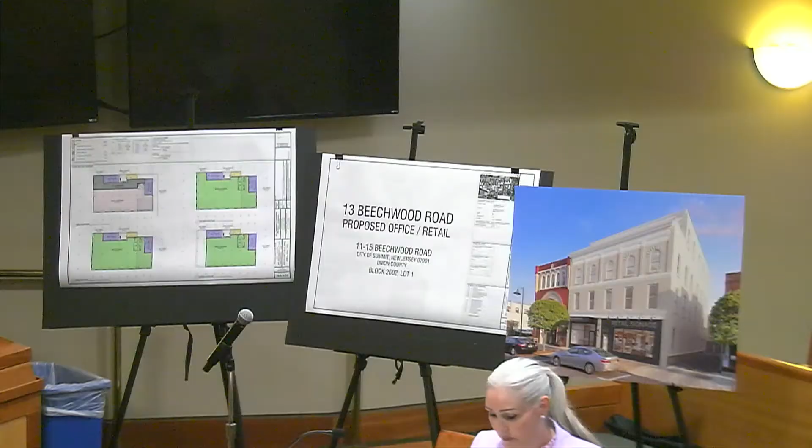You ready? Yes. Okay. In response to the comments and feedback received from the Board of Adjustment and the Historic Preservation Commission at the prior hearing, can you describe the process your firm undertook with the applicant to reevaluate the design and incorporate revisions to address the concerns that were identified? Yes, we carefully listened to the board and the Historic Preservation comments regarding the facade, the Beechwood historical elements of the building, the detail, the horizontal features of it, and also just the nature of the architecture.

And we carefully went into the building, took our time to study the architecture, really study the floor, how the building was braced, how it was built, to see if we could actually preserve the facade. After further consideration and analysis, we determined that there's a way to preserve the facade, set new floor elevations, do minor modifications to get ADA accessibility, modify the windows with slight tweaks on the sill heights, and really set the elevations so that we could work with that existing facade. That will require, if you don't mind, I'm going to approach the rendering and point out a few features.

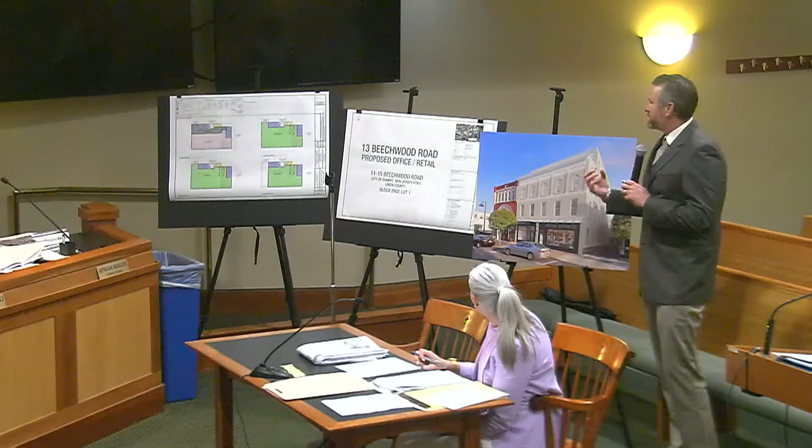If you don't mind, I'm going to go to drawing A201. It's our beechwood facade.

Due to this type of construction, which I'll get into further in testimony, we're going to have this as a lighter frame structure on the front, so it's going to be more windows and wood style architecture that mimics the style of the retail in the front entrance.

So it has more of that 1897 style of architecture that mimics what was there previously, and we wanted to maintain that similar Federalist and colonial style of architecture for the building.

Now that you've described the overall changes made to the design, can you walk the board through the revised plans that have been submitted and explain the specific revisions and improvements reflected on each plan sheet?

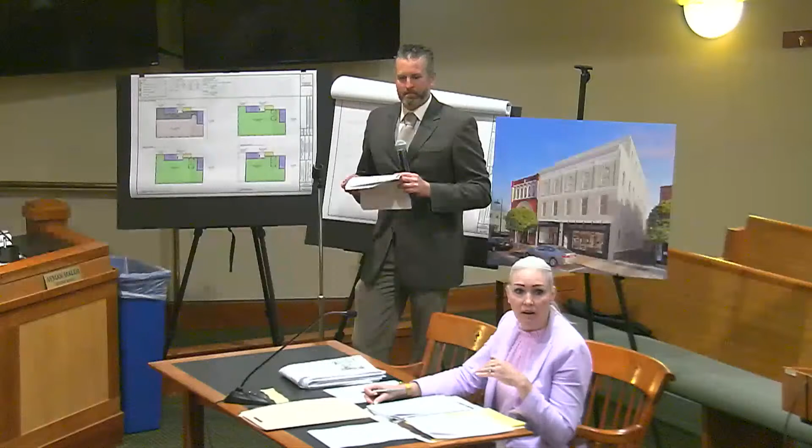Mind if I ask a quick question - is there any way you could actually get to that 299 without building the 4th floor? No. I'll have another exhibit that shows you technically why you can't, but if you wait for the next exhibit, I think it'll lay it out more clearly.

And if you could just go through the rendering and discuss the materials and the colors. Do we need to bring this one in as a new exhibit? No, this is part of the filed plans. Okay, so you're good, very good.

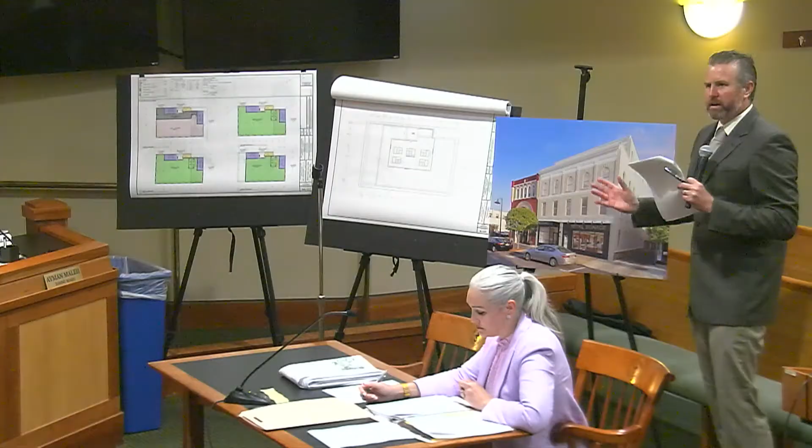So the existing building is white, pretty much washed out. Every cornice, every detail, every element of this building is just the same color - it looks like they just took a roller or sprayer and sprayed over it. So we want to accentuate some of the details of the building.

We want to accentuate with just a light color pop on the cornice on the 2nd floor, the cornice between the 2nd and 3rd floor, and that cornice element that caps the building. Also detailing and giving a slight color pop and variation for the column capitals, and that 4th floor element up above, as well as the infill.

The field of the building will be an off cream or off white color to give a slight contrast. We don't want a large contrast - something subtle that makes that horizontal articulation accentuate the building and make it feel a little more reduced in design.

The side facade we're going to paint. The reason is that to match that brick from 120 years ago would be almost impossible - we can find similar style and size but we will never get a color match. So what we want to do is paint that side facade, keeping that rubble stone finish.

Our base will be anchored with an off charcoal, something to make that retail entrance and that office entrance pop from the street. So it gives you some nice contrast on the ground floor, and then the field of the building neutralizes itself and gives balance.

What's the color of the storefront mullions, and what's the color of the window frames or the storefront on the fourth floor? The window frames will be white on the second, third, and fourth floor. The ground floor will be a bronze. Thank you.

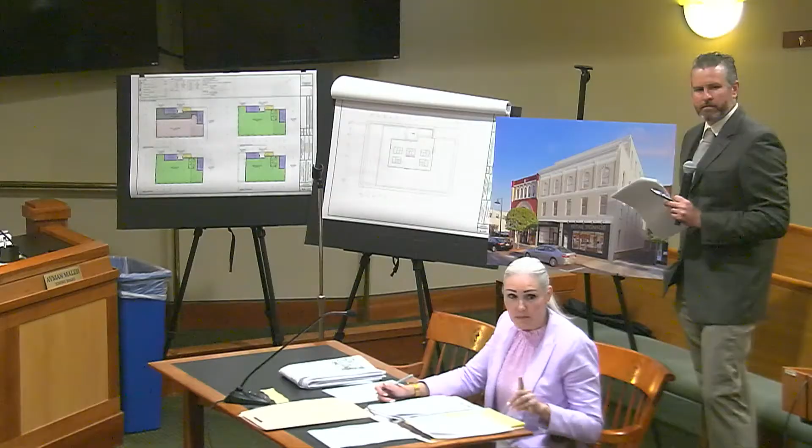Perfect. We're not to the exhibit yet, but I promise it'll be the one after this one.

You've prepared a comparative zoning chart, which I would ask be marked as A5. Can you explain what this exhibit demonstrates and how the revised plans compare to the original submission from a bulk and zoning perspective? Yes, we prepared a letter dated June 23rd, 2026, summarizing our changes to the plan and our approach. Attached to that letter is a zoning analysis comparative chart.

I'm not sure if the board actually got that letter. Oh, they did not get that letter. Okay, so I guess if you go through it, I can provide the board with a copy.

So the changes we made: first was building coverage. We had a reduction in building coverage from 84.10%, or 3,468 square feet, to 78 point... having a hard time seeing that number, let me bring myself closer. You're comparing to the previous submission, not the current construction? Correct, the previous submission.

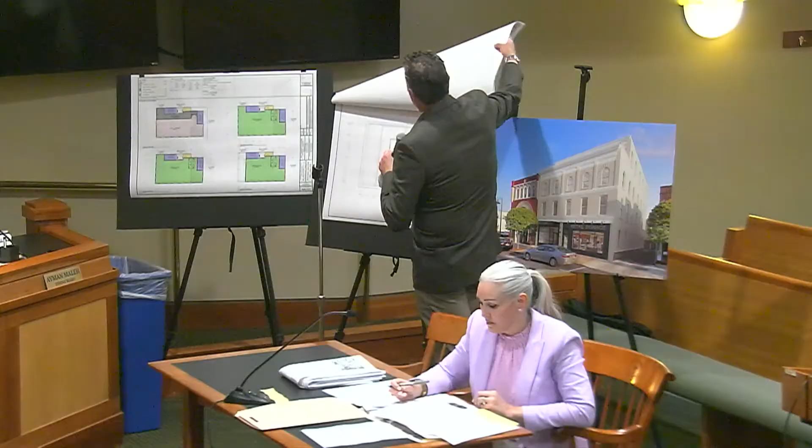I'm going to utilize drawing T002, our zoning analysis and site data. Our building coverage was reduced from 84.10% down to 78.25%, so we had a reduction of approximately 6% in building area. That's a result of us having a greater setback along our adjoining properties on the east side and to the northeast side. Setting ourselves back reduced our building coverage calculation.

So how many square feet does that boil out to be? That ends up becoming 3,227 square feet, where it was previously 3,468, so it's about 240 square feet.

So you reduced that, but you actually gained office—retail space—by doing away with the parking spots. Correct, retail space. Yes, but we also increased the setback in the back of the building, so that's where the reduction was. And then I think there's also an increase in the total side yard from 0.01 to 0.06 feet.

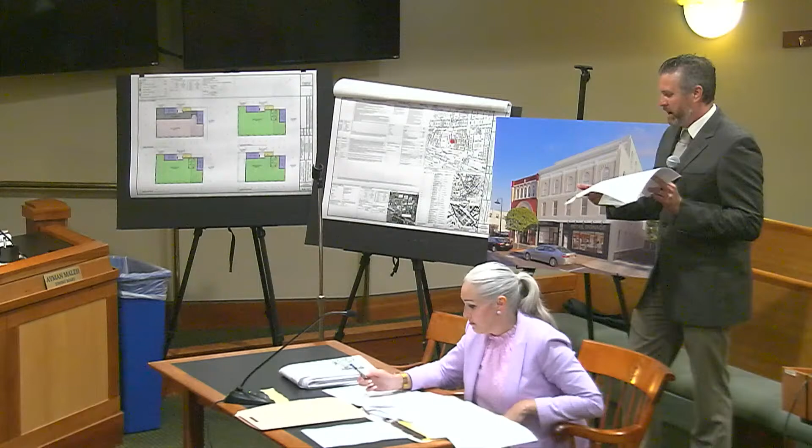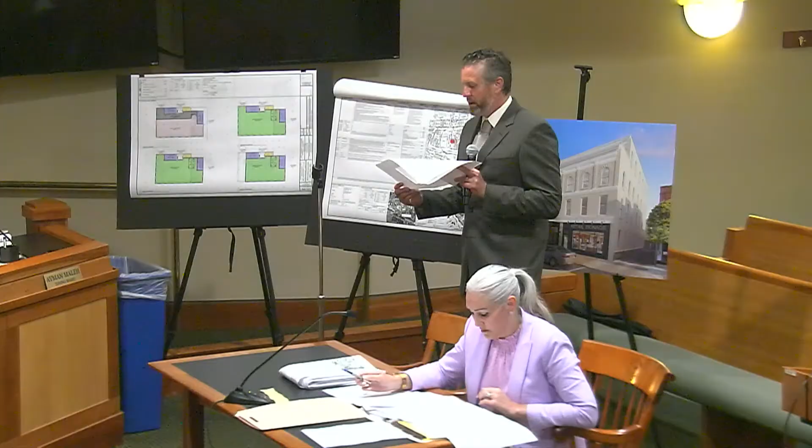We also reduced the building height by 3.67 feet as I previously stated, and the appurtenance was 3 feet 1 inch. We've reduced the mounting height of the facade lighting by 6 inches, down to where the existing cornice line is. We've reduced the terrace lighting on the fourth floor down approximately 2 feet, or 1 foot 10 inches, because the building height came down. Other modifications were signage mounting, also reduced in height because that cornice holds us to a certain elevation, since we want to keep the existing cornice and not modify that existing facade. We also modified the illumination for our lighting so that we have an egress path around the backside, needing lighting to illuminate that 5 foot setback. Going back to SP401, we're just illuminating this 5 foot area along the back of the property.

Okay, and then the original application also included a fourth floor component. Can you explain how the role and design of the fourth floor has changed as part of the revised plans, and how it relates to the other modifications made in response to the comments received at the prior hearing, using Exhibit A6?

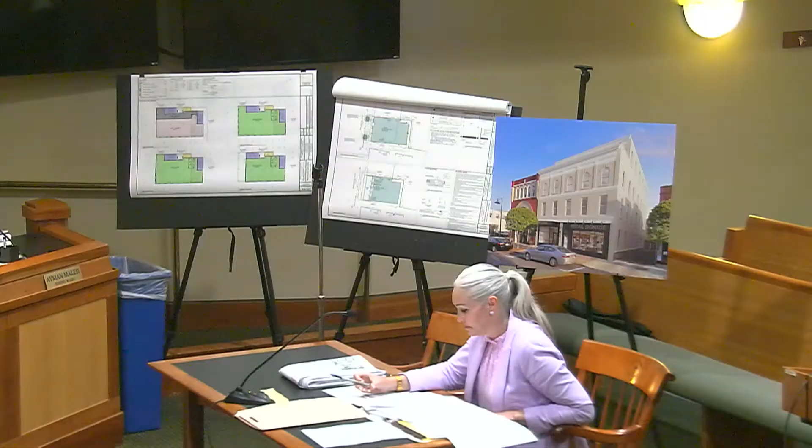So we prepared drawing AA201, an area reduction analysis of the volume that was lost due to setbacks or other components or site limitations that we had. If I can, I'll label that A6.

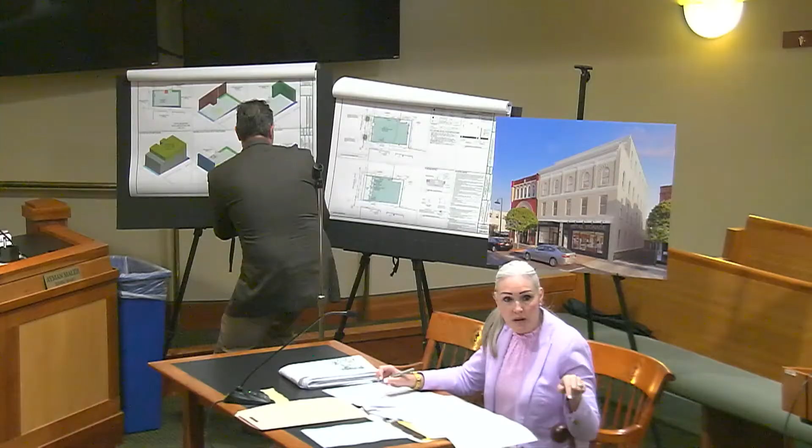And can you see that from over here? Do you want it in the middle? Would that be better? That's okay. You can easily move it. Yes, do you want to just move it to the middle? Because I think we can see it better. Thanks.

So we had a few constraints on the property. We have the existing facade, which is this image in the top right corner. The blue area is the existing setback of that facade, so that's 4.4 feet from the property line.

So 4.4 feet across the property equates to 630 square feet. That's 210 square feet per floor at 3 stories, which is permitted by the zone, by the CRBD zone, and that equates to 630 square feet of gross floor area.

If we were to build to the property line, to that front property line, which is also permitted in the CRBD district, we have a slight encroachment of our adjoining properties here on the north side. Both of those buildings have a slight encroachment onto our property, and the elevator is allowed to be eliminated from the calculation. So that, across 3 floors, at 119 square feet per floor, is 357 square feet gross floor area.

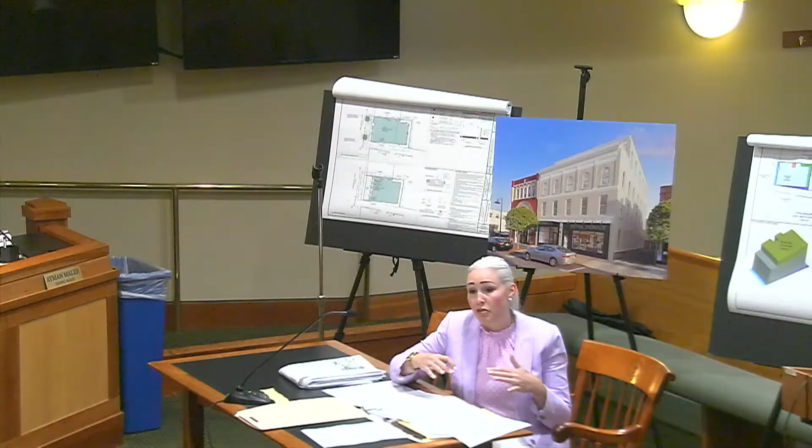So if they knock the building down and built it to the property lines, which they're permitted to do, they could put 300% FAR on 3 floors, but that would not be a better design. It would stick out beyond the boxwood property, so you'd have a building that projects beyond the boxwood building, our adjacent property, which would then reduce the sidewalk. You'd have a building that was touching the neighbors.

Well, I'm just saying, you're telling us you're losing that. Well, but you gained it with the fill into the backyard. Oh, yeah, from our previous application, we only gained 300 square feet from the fill-in of the parking. Times 4, is 1,200 square feet.

But I think it is easier to give a little bit of reference to what exists in this conversation, to not just compare it to the previous, because now we have a new set of drawings, and I think that's where some of these comments are. It should also be considered in relation to what is permitted, and what is permitted is 300% FAR on 3 floors.

This is not a comparison from the previous scheme. This is a comparison versus as of right. Yes, correct. That makes it a little bit better.

Okay, and you also prepared a sightline exhibit A7. Can you explain what this demonstrates regarding the visibility of the fourth floor from the public right-of-way?

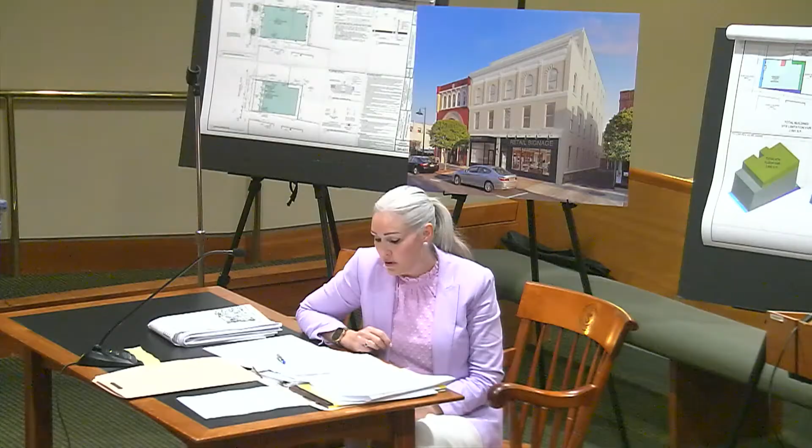I'm going to first start with the rendering because that actually depicts it. Do you mind putting this up really fast? It depicts exactly what you would see from the street. So we took this rendering from the opposite side of the property, and you'll get a glimpse of just that slight cornice on the top. We wanted to show the angle because we want to show the architectural style down the building.

But if you're walking down Beechwood, on the opposite side of the sidewalk, you would only see approximately 2 feet of that building across the top. You would see it on the side, but because it's the same architecture, it blends in. That was the other reason why we wanted to stick with that similar architectural style, is that it would blend with the existing building better.

So our line of sight diagram, and I'll come back to this exhibit now. Our line of sight diagram A301, I'll mark that as exhibit A7, shows a person 68 feet away, about my height, with a line of sight that would give you the top 2 feet of the building.

So I have a question about that, because watching the video over the weekend and being out there this morning, and now seeing this picture again, that exhibit and the one at the previous hearing, was that not intended to show the view of a pedestrian? Because my reaction was that that rendering looks like I'm a very tall pedestrian, if I'm a pedestrian.

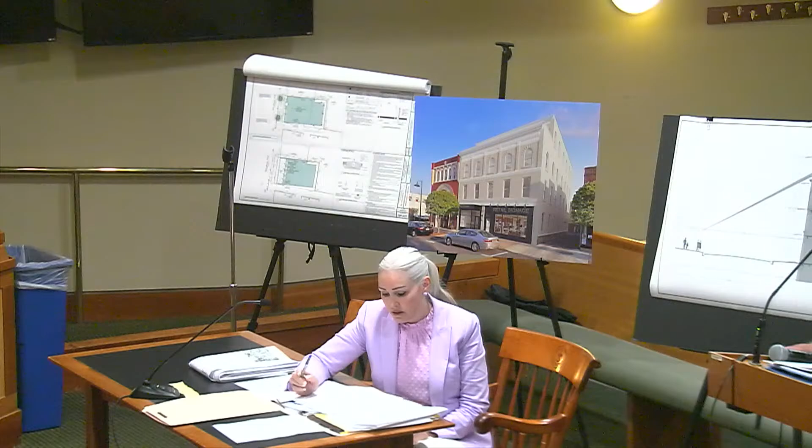Okay, perfect. Based upon all the revisions incorporated into the plans, including the preservation of the existing facades, the reduction in building bulk, the increased setback, and the revised design of the fourth floor addition, can you explain why you believe the proposed design is appropriate for the property and consistent with the character of the historic district? Yes, my first statement would be that we met with Historic Preservation after we completed this redesign, and we felt they were supportive of us maintaining the facade and keeping it.

I know they had a few comments in their letter about mullions and divided light, and I'll address that in a moment, but by keeping that facade, it meets the intention of Historic Preservation and the CRBD district and Historic District. We maintain the architectural style, the features, the vertical and horizontal articulation. I think the paint scheme accentuates some of those features, so it's not just a bland facade as it exists today.

From the historic preservation side, they had asked about divided lights. Divided light, in our opinion, is more intended for residential application. This is intended for office use, so we want to give them as much of a clear picture window as possible. If we were doing this as an adaptive reuse for residential, we would clearly do a divided light window in that application.

When we met with them, they had mentioned doing rectangular windows on the fourth floor with larger openings, but as we discussed, the arch top, due to the hierarchy of architecture, meant that putting a rectangular window over that arch top didn't seem like the right architectural element. Continuing that arch top on the fourth floor was the right answer to meet the Federalist and colonial style.

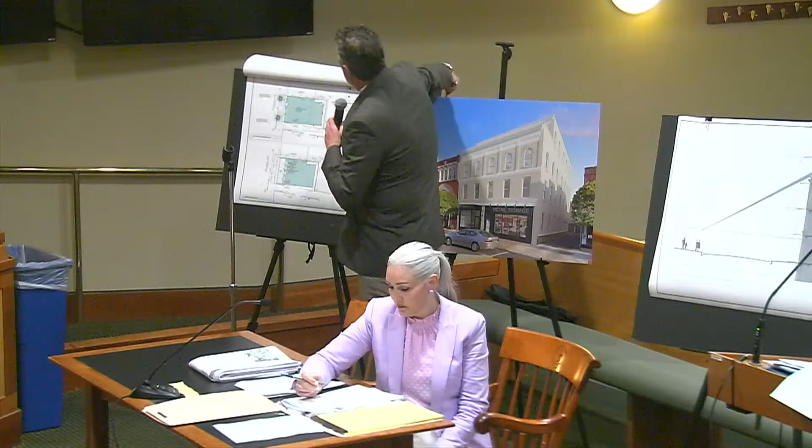Our drawing SP 302 shows there will be a time where we will have to do a sidewalk bridge to protect pedestrians and maintain sidewalk access. There will also be points where that sidewalk will need to be closed for certain portions of the construction, but the intention is to try and maintain thoroughfare as we did with 475. There were times we had to close it, and times the majority of the construction was open.

So would you be willing to submit a pedestrian detour plan? Yes. Beforehand? Yep, so we'll work with the police department and the building department to do pedestrian detour plans, site plans, and maintenance of traffic plans as necessary.

I think that's all I had. Chairman, thank you. A few questions. As was just mentioned regarding the sidewalk area, it wasn't necessarily identified in our report, but I was thinking about it. Do you see any utility improvements and replacement of the sidewalk necessary along the streetscape?

There will be replacement of the sidewalk. So you'll replace it in kind? Yes, that's correct, in accordance with the standards that are out. Yep, there are portions that will have to be cut up and removed as a result of general construction, setting the floor elevations, and also the resloping of that sidewalk to our accessible entrance points.

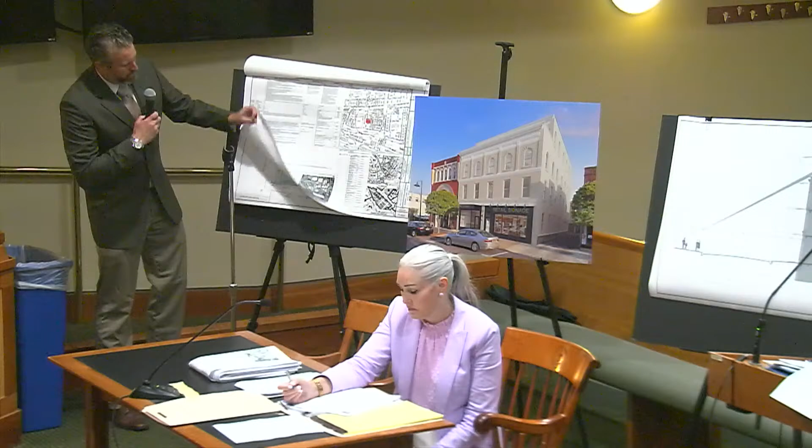I can actually show you what the scope is on SP 101. If you look at drawing SP 101, detail number 1, there's a hatched area that we expect that portion of the sidewalk to be replaced. So it will end up having to tooth into that existing sidewalk, but we want to match the city standards there.

And that's the hatched area you're talking about on the property? Yep, or so it goes beyond the property because we'll have to rework some of that slope and rework that sidewalk to maintain accessibility. I see that now. Okay, thank you for that clarification.

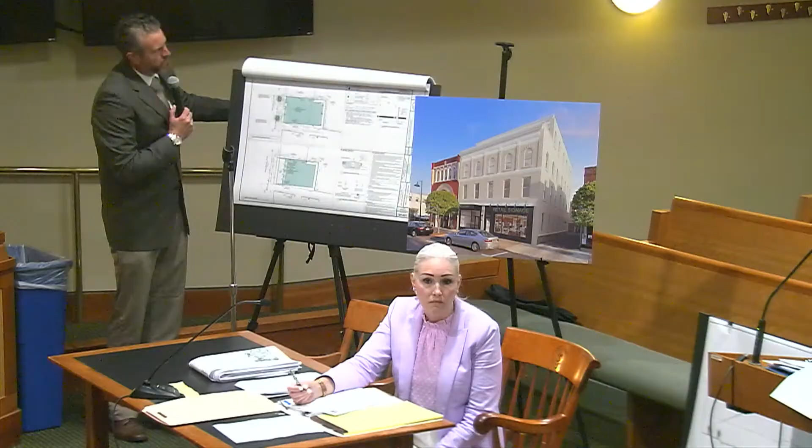Regarding the dumpster enclosure areas, I think you identified that you did an analysis to make sure there's enough trash area for the rest of the building? Correct, so that's on drawing SP 401. There's a trash calculation or refuse calculation in the top right corner, which has been revised since our previous application due to the area of the building. Okay, thank you.

Looking at the architectural rendering you provided from the street view, the side elevation of the building, the alleyway itself—is there any need to differentiate the fourth floor from the third floor? Is there any benefit in doing so from the design standards guidelines? It talks about breaking of horizontal or vertical elements. I don't want to cross over with the historic commission, but is that something you would have an opinion about?

Yes, we wanted to maintain the third floor. Changing the spacing of the windows and the style of the windows would have changed the hierarchy of architecture. So that arch top window on top of an arch top is what you would see in the colonial or federalist style. Okay, any reason then to have a cornice or a band that would break it?

It doesn't exist today, so we wanted to maintain the existing. Right now the current facade actually steps past the chimney and drops low. I can indicate that line on drawing A201—I'm sorry, 202.

My only reason for identifying that is because of the view down the alleyway of how you can't see it. Understood. So right now the building continues on a straight line here. There's a slight chimney, I see, and then it continues there as it drops down, because this roof slopes in one direction to the rear of the building. That's the existing outline of the building on that line.

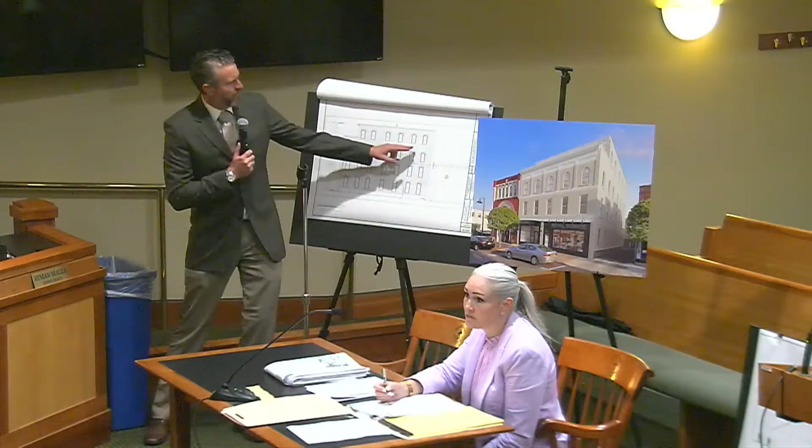Yes, that's what I was going to say. I think if we wrap this cornice around, it will take away from the Beechwood facade, and it would actually accentuate that fourth floor, where right now it blends in vertically as part of the field of that side alley. So if we had that horizontal break here, I believe this would look like a cap on the building rather than part of the building.

Okay, thank you. David, this may be a better question for the planner, but I'll ask it anyway. As you were thinking about this redesign, did you look into the prevalence of structures in the area that are 4 or more stories? Yes, and the planner has an exhibit and will testify to that.

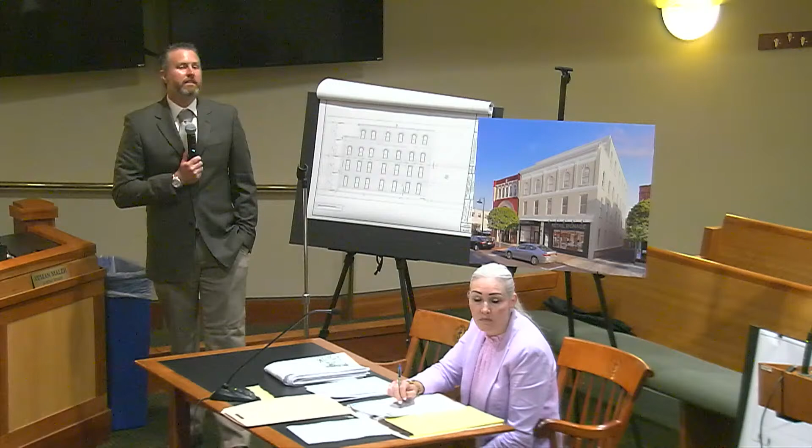Just a question for Jay, on the rear yard setback. It's 5 feet minimum, right? That meets zoning code, and there are no issues with lot line windows or anything like that? There are limitations, I believe it's 20% of the facade can be glazing. How does this impact your neighbors that have existing windows in the property? In the analysis of those, all the properties were less than 20%.

I'm sorry, I didn't understand. Are you talking about the rear neighbors? Yes. Both on the alley side as well as the north side. I'll go to SP 101. So there are windows on our adjoining property here, and then there's a window here, and we're proposing a few rear windows as well. That window to solid ratio can't exceed 20% with the 5-foot setback, so we are under that calculation.

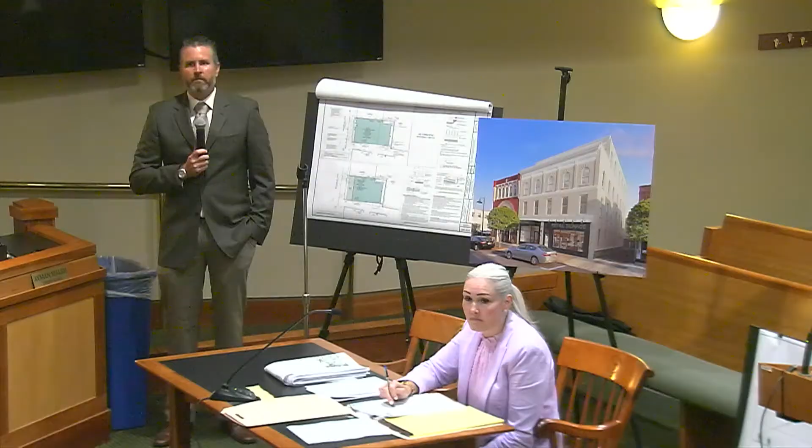All right. Any other questions, Don, go ahead. Are there any exterior sprinklers on that wall? No, it's a fully sprinklered building though, within. And we've done deluge systems on facades if necessary, but we would defer to the fire subcode to advise us on that if he requires it. But again, it meets the building code standards for setbacks.

All right, any questions? You said there's 5 units, where are the 5 units? Is it like retail 1 and then each floor? Yes, just got that. I'll walk through each of the floors really fast, starting with drawing.

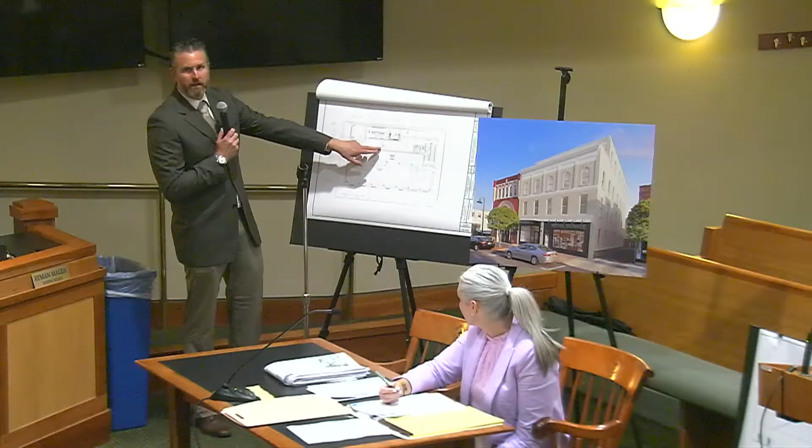A102, which is our ground floor. We have the retail as number 1, we have the office lobby or first floor common area as 2. We want to keep those zones separate. And then there's 3 floors, so we have 1 unit for the second floor, 1 unit for the third floor, and 1 unit for the fourth floor, which would be the 5. The second one on the ground level is what confused me. Thank you. I don't, because of hours of operation, we don't want to have retail and office commingle in their units.

Do we have questions, questions only from the public? No? Okay, next witness, Hillary. Paul Greigel.

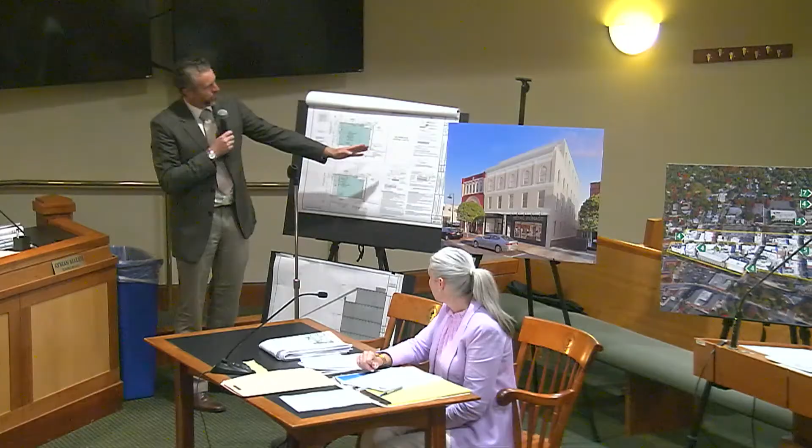So you're correct, the Beechwood facade faces west. The sun pattern would be along the south. Your shadow would be cast starting in the morning, going across Beechwood Road, but because of that setback, it will cast a shadow on the terrace, so it shadows itself. As it comes across the site, you'll have a slight shadow onto the roof of the northern property. Continuing about midday, this is only during winter, you'll have a low sun that casts a greater shadow onto the roof of the northern property. As the sun sets, you'll cast a shadow into our previous parking area and onto the building to the east, which currently has a shadow on it already. So I don't think there will be a negative impact on the shadows from the property.

And how many stories is the building behind you? It's a two-story. Okay, thank you. And the one to the north is a three-story building. So you don't envision any impact from the shadows? No, it will not exceed the building limits of what's existing. There's already a three-story building casting a shadow there, so, okay.

And then the last question I had, because maybe Mr. Ball has this, but there was some discussion about noise and when the lights would be used, and the no speakers condition. I don't know if that should be a condition. But also, I don't remember, I didn't write it in my notes from the last meeting, what were the stipulations about the hours of use for the outside?

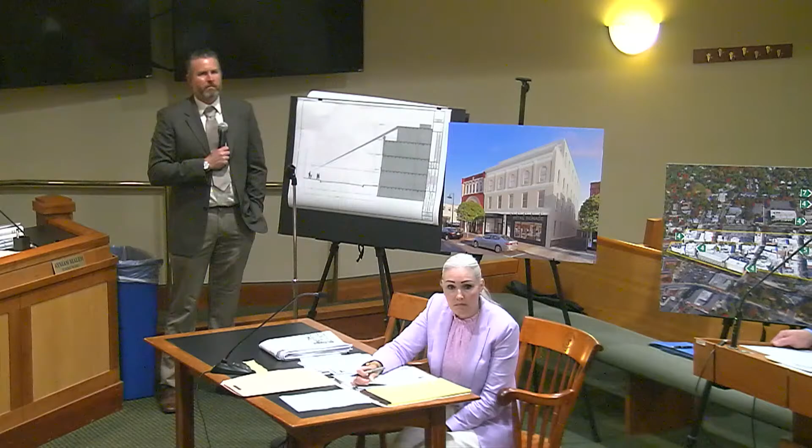What other questions? I'd like to piggyback on the concerns expressed by Mr. Nelson and Mr. Mullen about the four-story aspect of this. I may have a narrower definition than Mr. Greikel's diagram. I today walked an area roughly bordered by Maple, Springfield, Summit, and Union Place, and I noticed the Bassett Building, and there's a 4-story building on Summit Avenue across from the barber shop. I don't know when they were built or what the zoning rules were then about stories, but they're certainly both old buildings.

Walking on Beechwood and especially Union Place, but Summit Avenue too, there are a lot of 1- and 2-story buildings. What I'm trying to get at is my concern that the city at some point said 3 stories is what we want to limit it to, and there are in fact a lot of 1- and 2-story buildings. In the immediate vicinity of the applicant, this would be the only—well, I'd argue the Bassett Building faces Summit Avenue, so in terms of Union Place and Springfield, this would be the only 4-story building. Aren't we taking a big step going beyond the city's desire to limit to 3 stories in that immediate vicinity?

Again, I do not believe so, given that it's not a full 4th story—that's part of it. It's a very unique circumstance, mitigated by the alley next door and being set next to a 3-story building. As far as 1- and 2-story buildings, sure, some exist, but the zoning allows 3 stories, so over time you might anticipate many of those buildings will be redeveloped.